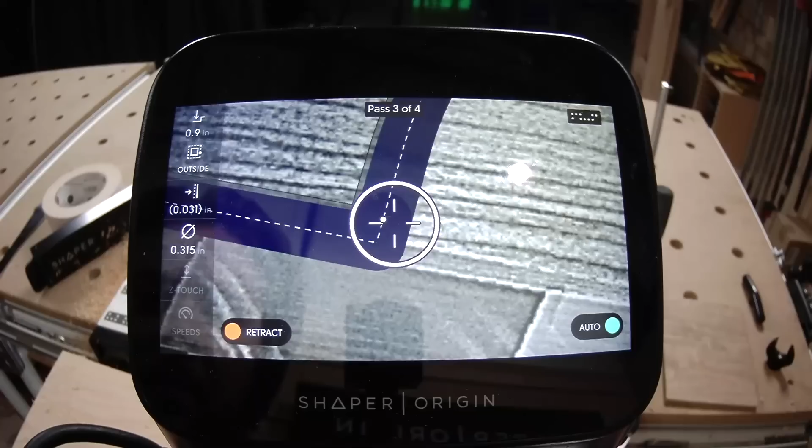Like I said, we're doing a roughing and a finishing pass here. So there's a little bit of space on that roughing pass, and then we'll come back and remove just that last little bit of material on the finishing pass.

As we come around, Jake's going to come into his finishing pass. What's nice about AutoPass is that it helps you seamlessly transition from that roughing pass to the finishing pass, and also through the 3 depths that Jake cycled through. He didn't have to pause and update that depth manually or anything. He was just able to let AutoPass figure that out and bring him right down to that final depth in a series of reasonable steps.

You can see he's also moving a lot more slowly and carefully on this finish pass, because that's when you get your final finish edge quality. When you're roughing, you want to remove all that material as fast as possible, and sometimes on this show we might take it a little on the fast side. But when you're finishing, you want to make sure that you just keep it nice and smooth, and that'll give you the best possible results.

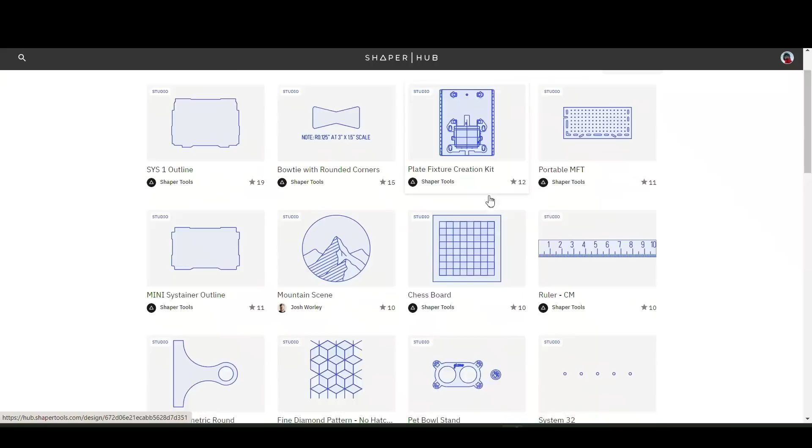Here we are. We've got 146 shared studio designs right now, and all kinds of things here. We've got Systainer outlines for the Sys1, that customizable mini Systainer you'll get with the promo, so you could customize your mini Systainer starting here. We've got a bow tie you can scale, fixture creation kits for things like Shaper Plate and Shaper Workstation. Scrolling down, there are more fun things for the home, like a pet bowl stand and a symmetric handle.

People have already started to contribute to this. We've got a cool mountain scene here. Scrolling down some more, there's a cutout for the Shaper caliper that you might want to use for your Sys1. But we're looking at these cutting board handles today.

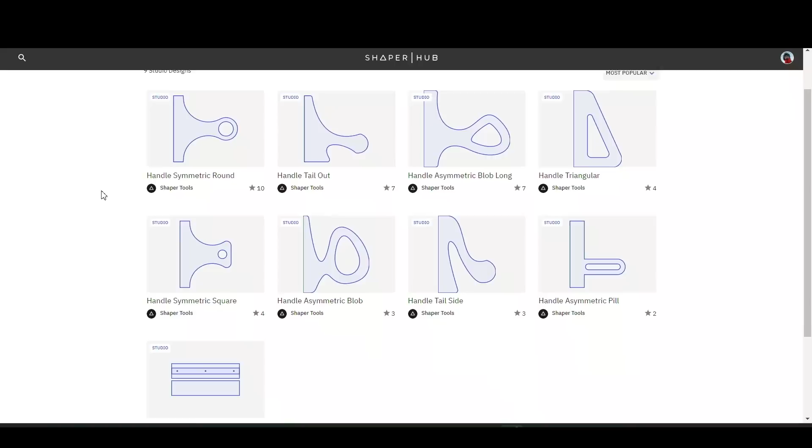So to find all of those, I'll just search for handle. And here's your big list of options. Obviously people are going to add to this, and we're really excited to see what people make. But today we're working with something we shared here at Shaper, this symmetric square handle.

When we click into this, you can see it's got an image of that 2D shape and a short little description: add this handle to your design and scale to fit for a unique cutting or serving board. We're going to do exactly that.

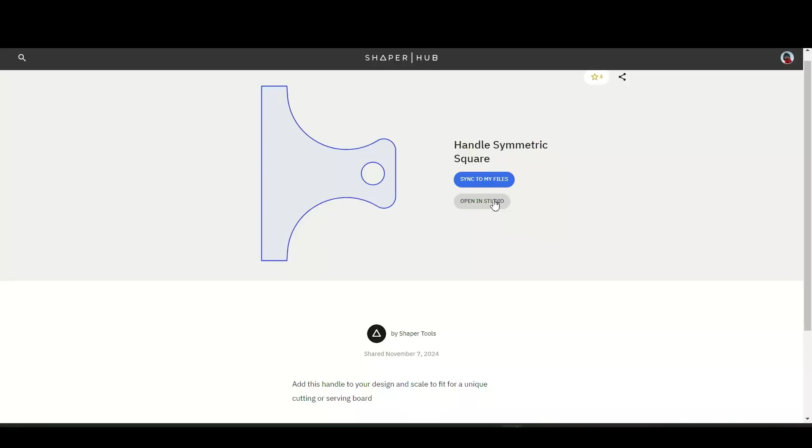Now how do I start to open this and work with it? I'm going to open it in Studio. This is a cool reminder that as of this year, all the features of Studio are free to everybody, so we really encourage you to check that out. And everybody gets 3 free exports a month.

You can design your own cutting board. You can do 3 a month. It's kind of a lot. Yeah, it's a lot of fun.

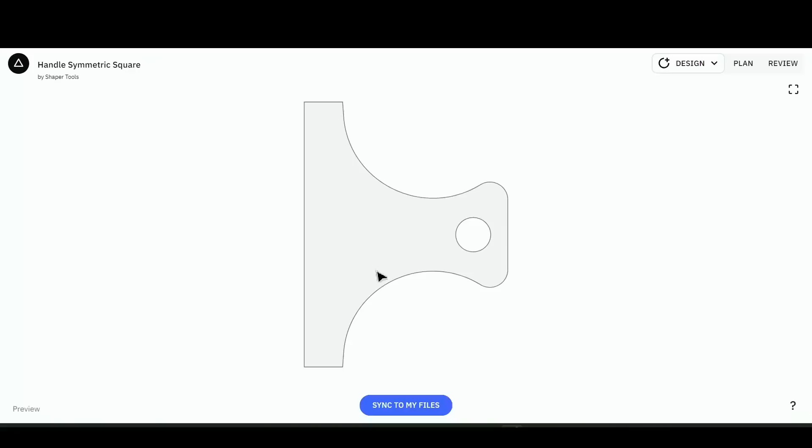So what I'm going to do here is sync to my files. Once it's synced, I can go ahead and edit that, so I'll click this edit button. And that takes me into a new design. It's automatically going to name that as a copy of the design you are forking or remixing, so let's go ahead and rename this so it's something I can keep track of better.

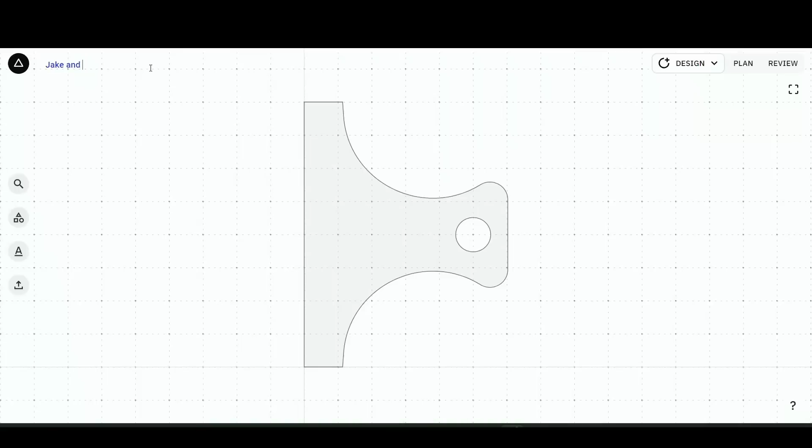Jake, I think I should make you a holiday gift today. What do you think? Perfect. Jake and Jamie, holiday board.

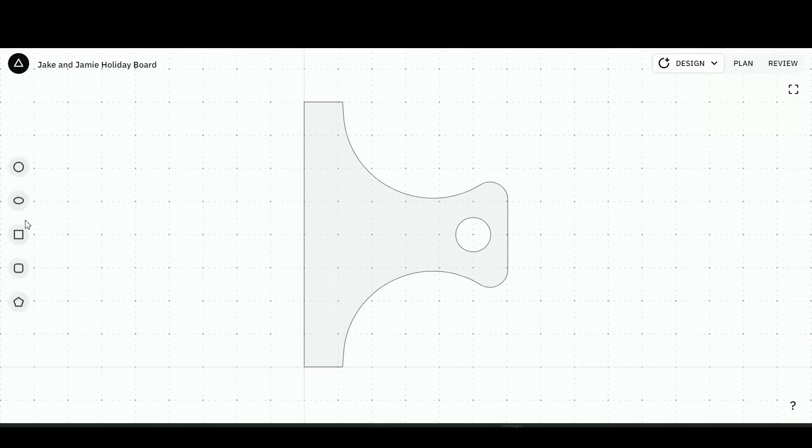Obviously we just have a handle here, so we want to add something to that. You could do all different sorts of things - you could add a circle if you had a big circular piece of wood. We're working with just an 8-inch wide cherry board, so I'm going to add a rectangle to this.

I measured some of this stuff before the show. I want to make it 8 inches tall, to match this cutting board handle here. And then I want to make it 13 inches wide to fit the board that we have. That's a nice looking rectangle.

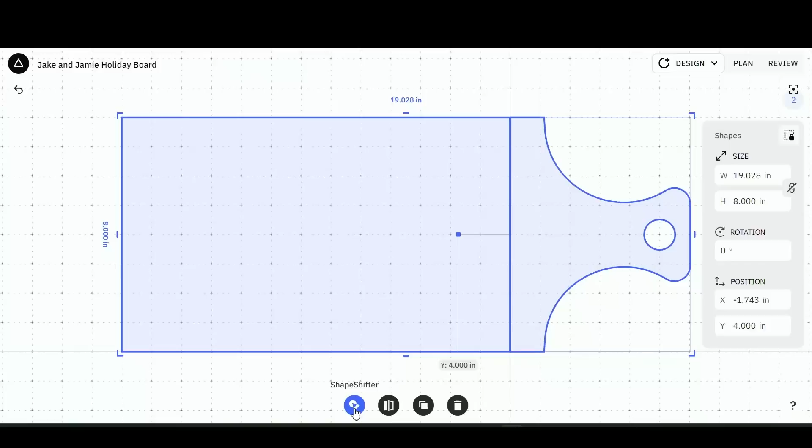If I drag it over here, it snaps right to that shape. This button at the top right lets you recenter - super easy right there. The first thing I'm going to do is hit Control A to select all, and I'm going to Shapeshift these together. Shapeshifter is our easy way to combine shapes. It's really powerful - we'll use this more later when we create a shareable holiday ornament.

We'll click just these two. I want to leave this hanging hole open—never know when you want to hang your cutting board up. Make that shape, and there we go. We've just remixed a cutting board handle into a cutting board.

Adding text is the same as ever. Just hit that add text button. Let's do J and J. And this is really small, and it's not the font that I want.

It's in the middle here, so we have a few things to change. The first thing I want to do is pick a font. Since we're going to be engraving this with Origin, my favorite fonts for engraving are these single line fonts. Since it's a gift, I really like this script, Big Tomato—that's going to look really tasteful.

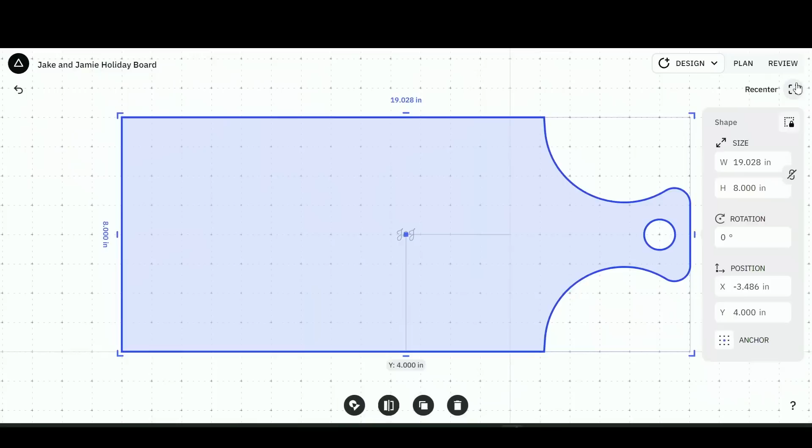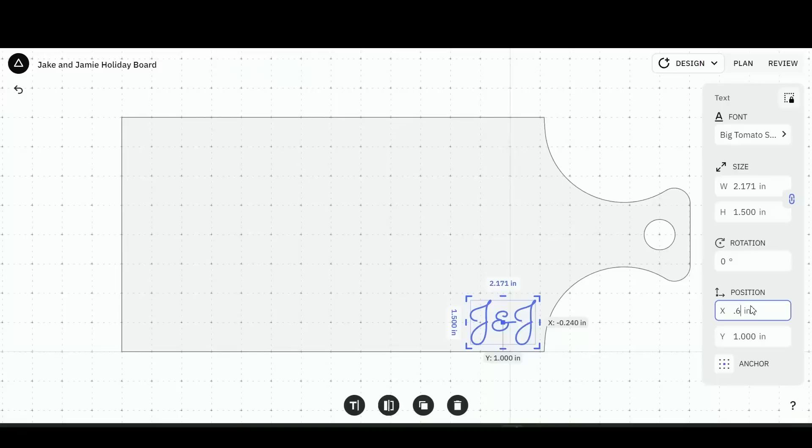Click out of that and zoom to center everything again, just so I can look at this in place on the cutting board. Still pretty small—let's make this 1.5 inches tall. I like that, and I want this over here somewhere. Let's make this, just to give it some numbers, minus 0.6 in X and 1.4 in Y.

And there's a cutting board right there. That's a start. The second step, which I forgot to do before the show—and this is why we had an online cut when you started—is go to plan mode.

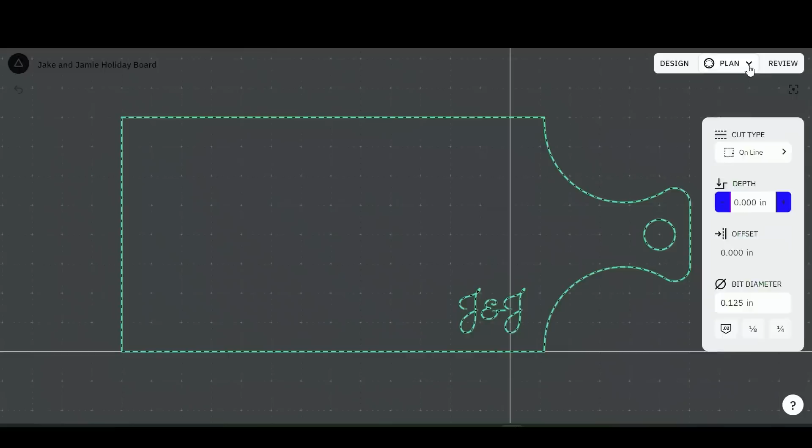A lot of these shared shapes are in kind of a neutral cut style. This outline is pre-programmed as an online cut. We want to keep that online cut for the engraving, but for the cutting board I would make this an outside cut. I know that this cutting board is 0.9 inches thick. I'll cut this with an 8mm bit, and I know that clears out that circle there.

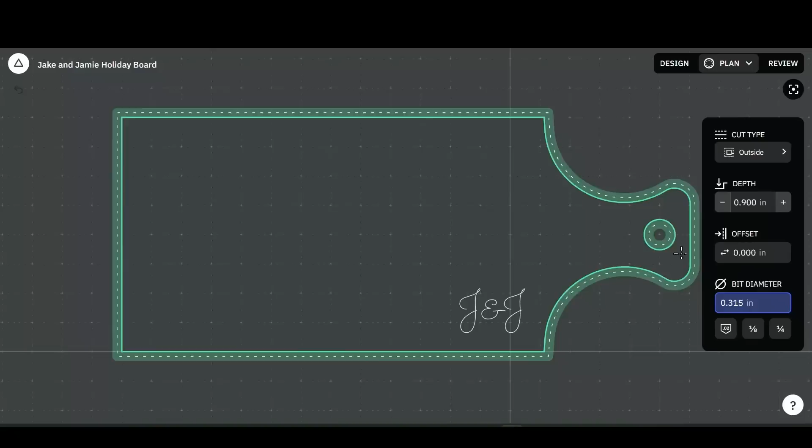Then for the J and J here, let's select all of these by holding Shift and clicking. We'll keep those online. I want to make these really shallow—let's just say 0.02, and let's use a small engraving 0.02 diameter bit for that.

Now if we review, you can see we've got this nice bold outline—that's exactly what we want. That's cutting all the way through, and then a nice shallow engraving. Sweet, that's all there is to it. So this makes it way easier to start with a cool design that somebody else has made and shared.

And then kind of bake that into whatever you want to make for yourself. I love it. I got to ask a question now—what if you didn't want to make an 8-inch wide cutting board?

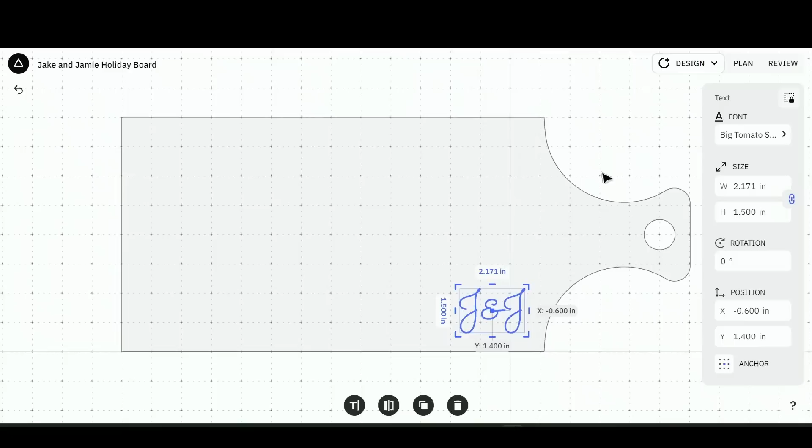This is very important because our material is actually slightly less than 8 inches wide. This is a good reminder. All right, let's Control A, select this whole thing.

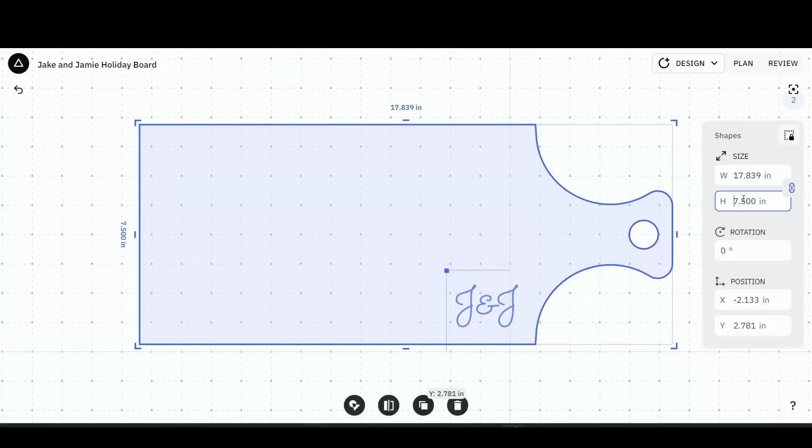Let's link that height and width there, and we can make this—instead of 8 inches tall—I think I wanted to make this 7.5. That's what we're starting with. That just scales the whole thing. And you could do just the height, or the height and the width. I think I had these linked when I scaled them before I sent them to you.

This would show up immediately on Origin. Jake already has a copy on Origin because we designed this before the show, so it's already over there.

We could try to line things up again and make that all flashy—yeah, but I think you actually got rid of your corner point on this because you absolutely cut through the stock on this one. The stock's gone. Yeah, so we should just leave it how it is. What do you think?

You know what, I bet I could get away with a rectangular probe, though. Yeah, I could still find the center of this. You could find the center of that. Make sure to update your tools, everybody, to Larkspur.

Okay, let's go through that. Let's do it. All right, just for kicks and giggles, let's say that—oh no, we've lost our cut file. I picked it up and I put it back down. I took my material off a workstation, so I don't remember where anything is. How am I ever supposed to?

I'll even go one step further and just create a new grid or a new scan. New scan, yeah—you took your material off, you want to go back, you want to make an engraving. Let's start again with a new scan. So reminder for the new folks, a scan is making this image map that Origin works off of. If we zoom out here, we can see our entire workspace, including that cutting board that we already cut.

Rectangle Probe is a new feature included with Larkspur, our latest free system update. You'll find it under Create, Rectangle Probe.

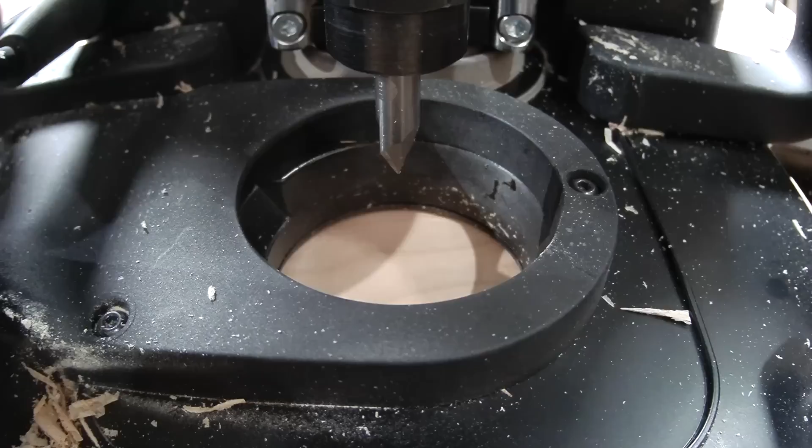Hopping down to this lower camera, I'm holding the green button and physically lowering the bit until I'm just above or just touching the material. Set 0 to finish, and there we go. Now we can trust that our 0.02 is definitely 0.02, not 0.02 plus however far a sharp bit went into the wood.

All right, I'm going to buzz this out. Are we changing anything about speeds on this? We're going to bring our spindle speed down to a 3. Let's double check our auto - 15 feels all right. If I was doing a lot of text I might bump that up for the sake of time, but 15 feels good.

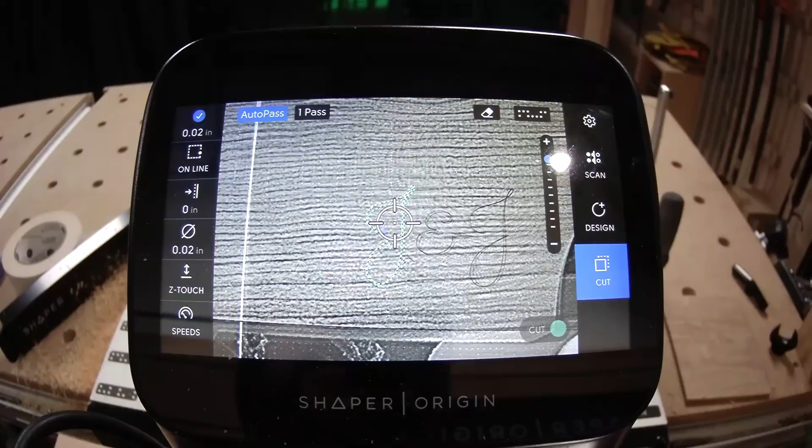Engraving isn't removing much material. We usually turn the spindle speed down on this more than anything because it's quieter and easier on the ears, so feel free to turn that spindle speed down when you're engraving.

It's kind of counter to the general idea of turning the spindle speed up when you work with a smaller bit. That's because the tangential point on these smaller cutters isn't moving linearly as fast as the edge of a bigger cutter at the same RPM. But again, for an engraving we're not removing much material, so it's not really taxing the cutter or spindle at all - it's totally okay to turn it down and give yourself a quiet shot for a minute.

Sometimes I don't even turn the vacuum on when I'm engraving. Don't tell Jake.

Very nice. It's very tasteful. Merry Christmas. Thanks - from me.

All right, pop that off. Oh yeah. That double-sided tape sure is something. I mean, you can't buy one without the other, honestly.

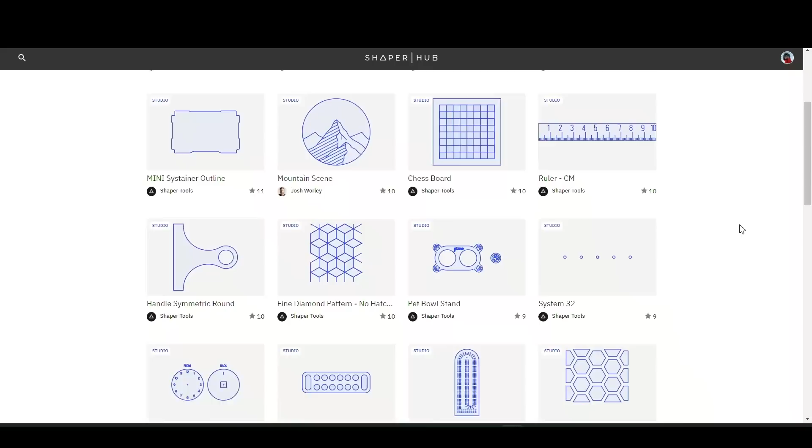Specifically, these are signs with text, and we've done these in a really clever way where you can update the text. There's one I'm looking for that's an elephant sign, but you know what I'm going to do? I could just search for sign, but I'll just click on this elephant name sign.

We're going to open this in Studio. What you're going to see is that this is all editable, so you can make this for whoever you want. Let's open that in Studio.

Sync to my files. Edit. And here's what's cool: make editable to customize name. Then select all objects and shapeshift to make a singular shape.

So we've got some instructions here as reference text, and you can see the difference between these two. This one has the text that has not been shapeshifted together, it's all individual letters. This one has been shapeshifted together, so this isn't going to be editable down here at the bottom.

There's no undo button on this one once you've shared a design. So if you're sharing a design, and we'll go over this some more, you want to make sure that you share it without that text locked in and shapeshifted together.

So what we're going to do is take this, we're going to unlock, make editable. Let's actually click and drag and make all of this editable. I think because I did the one, I can't do them all, but it's only 4 shapes. Make editable. That's nice. Here we are.

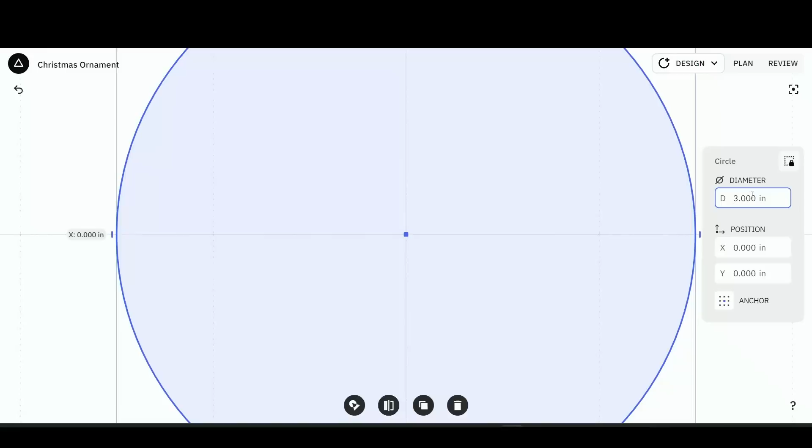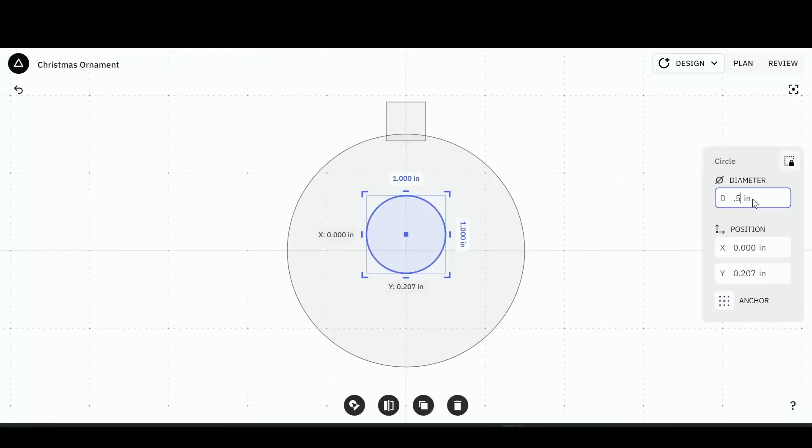We want one of those little caps on it. I think probably a half inch is good for this in width and height. We can just snap this up here by eye. We want a little bit of overlap. Zoom to fit again. We want something to hang this with, so we'll do some little hanging circles at the top, again with a little overlap. The snapping is making this really fast. Do a quarter inch on that one. Drag it, and it'll just snap to the center of that circle. We've got our hanging hole up there.

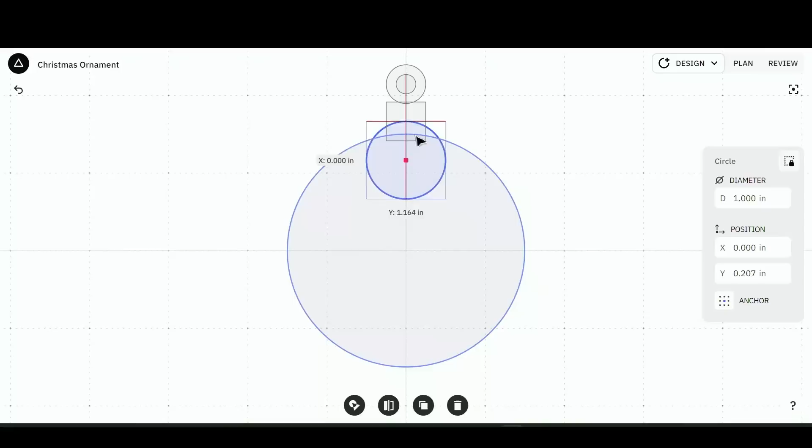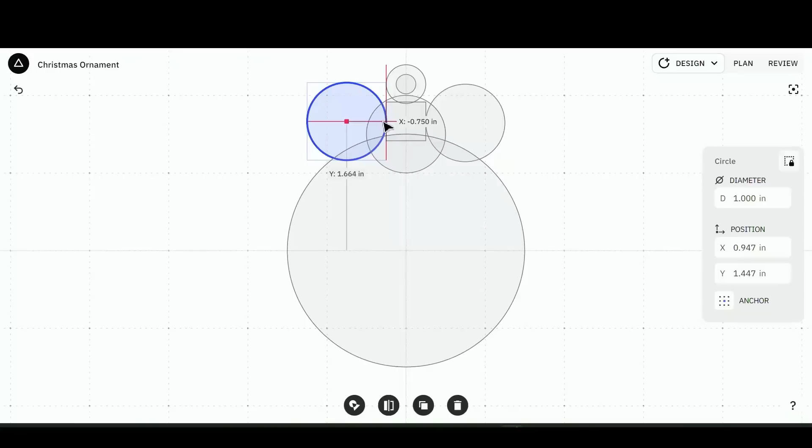I want kind of a frill on the top here to make it look a little more Christmassy. What do you think about that? That's a place to start. Let's add another one here, a little farther out. I like that, kind of snapped position. We'll do this one a little farther up. You can also hit Control D to duplicate these shapes. And that's mirrored right there. There, that's mirrored.

And we need some text. You know what? Let's do all the shape shifting on this first, because before we do the text it looks like it's going to be a Mickey or Minnie Mouse. A Mickey Mouse Christmas ornament.

Okay, yeah, let's get this to the next step here with some shape shifting. There's 2 things that we want: we want this big overall outline, and then we also want this little frill that's going to be engravable. So I'm going to select all, or Control A, to shape shift everything. The first thing that I want is just the outline of this ornament, so there we go, got that sliver. It's going to be the bulb, the cap, and the hanging hole.

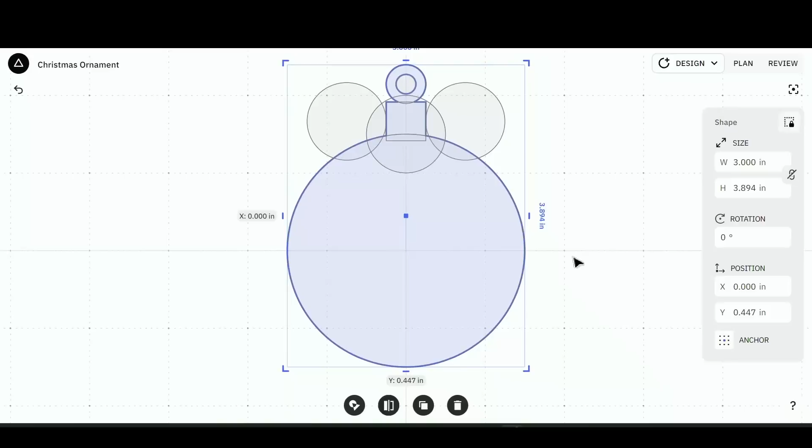Nice, but I'm going to do some more to this, so I'm going to keep existing shapes. Make shape. So we have a new shape now, but we still have all the old shapes. I think I actually want to bring these down a little bit, and bring these in. Do you do that too, count the number of times you tap the arrow keys? 10 taps, 5 taps, 10 taps.

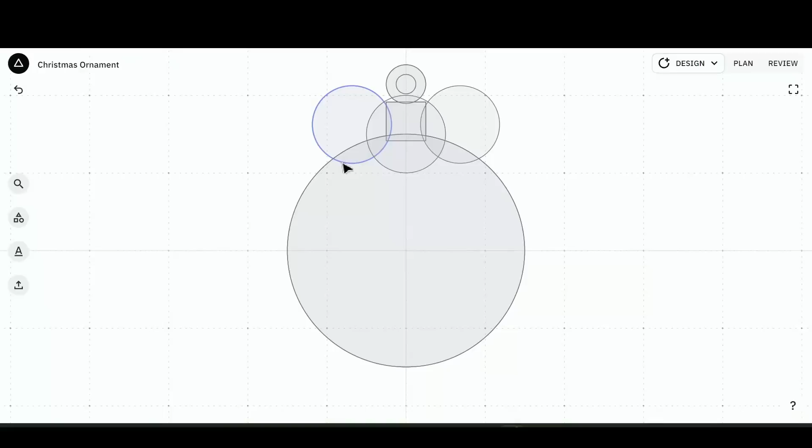Make that symmetric. Okay, so now let's get this little engraving here. Studio does not draw open paths, Studio draws closed paths for now, and so what we want to do is make a closed path that includes this frill here. Let's do this. Control A, shape shift again.

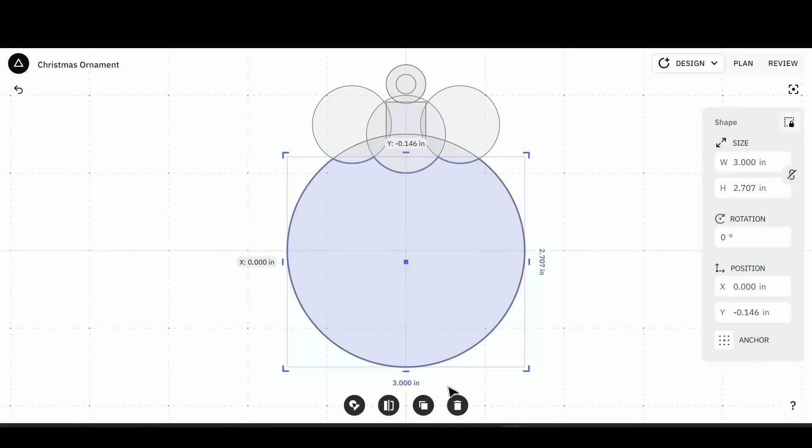And really all we're going to do is keep this one. We want to keep all the shapes for now, but we're going to delete all the extras. This is the new shape that we're making, and this is going to give us that frill at the top for engraving. Very cool. Make that shape. Okay, so we've got a bunch of stuff in here.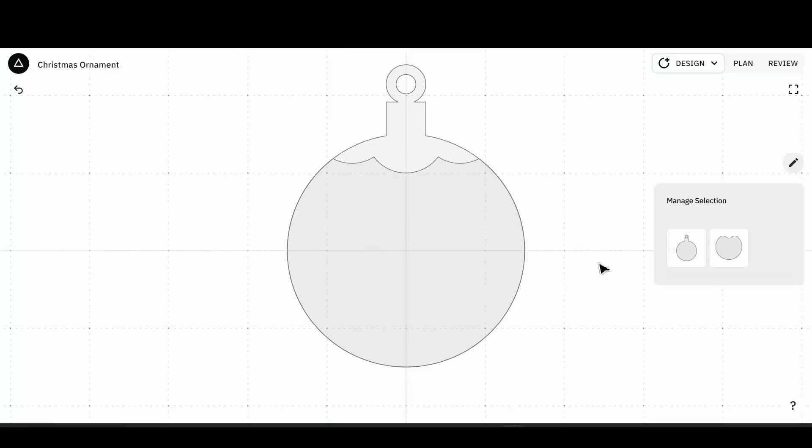When I hit Control A, which is select all, it says I have 9 shapes in my selection manager over here. I can click on this. I want to delete everything except for these 2, so I'll just click on the bulb and the scallop to deselect those, and then I can just hit delete. Boom, and we're left with just 2. How's that? I love that.

Now let's add some text. I'm going to go with Jake again. You've just got such a good name for TV, fast and easy to engrave. Yeah, exactly. Okay, let's go back to that big tomato. Again, I love that.

Recenter everything. That's pretty small. This bulb is 3 inches wide, so what if we make Jake 2 inches wide?

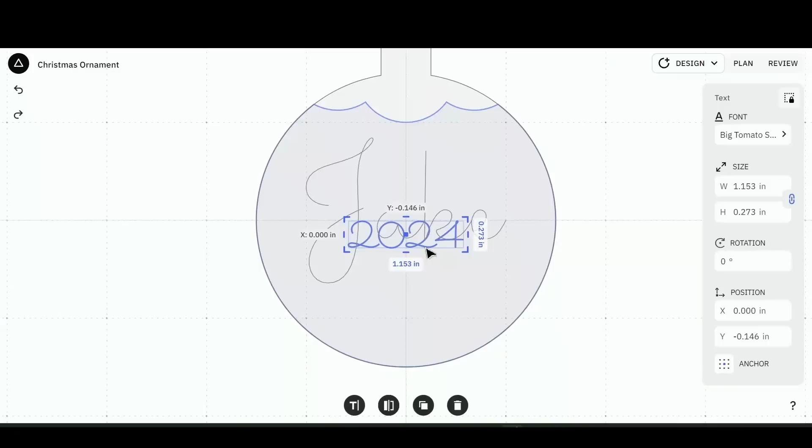I think it's great. Okay, we've got to plan this out. Last but not least, overall this is going to be an outside cut. A 1/4 inch bit is going to give us at least a little bit of these tight corners in here, just enough to differentiate that. I think that's okay. I've got an 1/8 inch ready to go. I said a 1/4 inch, but I meant an 1/8 inch. There you go, so we're on the same page. Everything else is going to be an online cut.

Let's make this 0.02 depth, 0.02 bit. Same with all of this lettering. 0.02 depth, 0.02 bit.

And what depth do we want for the outside? I think a little over 1/8 inch is going to cut through that. I think so too, let's go for 0.2. I know that's overkill, but that'll do it.

And now if we go to review mode, here we go. We've got an ornament cut out, we've got our little frill, we've got Jake 2024. Nice.

What is the depth on that? I saw you just measured it. 0.187. Okay, so 0.2 is good. Yeah, alright, let's go back to our design.

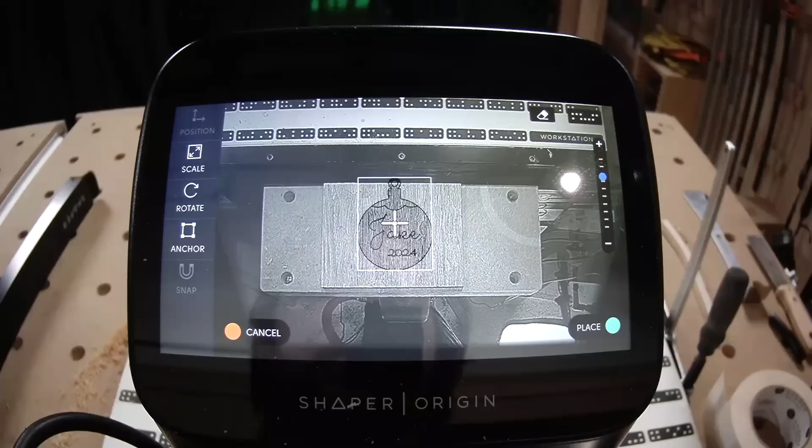Now I'm going to do a little bit of selective engraving for this top. I don't necessarily need to engrave the entire shape, so I'm just going to plunge right here in that corner, come across, and retract.

My tip for this is that Origin wants to kind of snap itself, the auto correction, to the closest point in that corrective range. So if you start on the outside of that corner, the closest point is going to be the corner of that engraving. And then we want to end up in a similar position on the other side so it doesn't auto advance past that.

I'll do that one slow. Yeah, cool. All right, let's get it. Selecting that engraving, starting at that corner, then plunging, and there we go.

You want to make sure that you're following the direction of the dotted line on this one. So perhaps if Jake had started on this other corner, Origin wouldn't have wanted him to go the right way, because Origin typically tries to prevent us from doing anything like climb cutting. But when we're working with a closed path, it just kind of needs to pick a direction there.